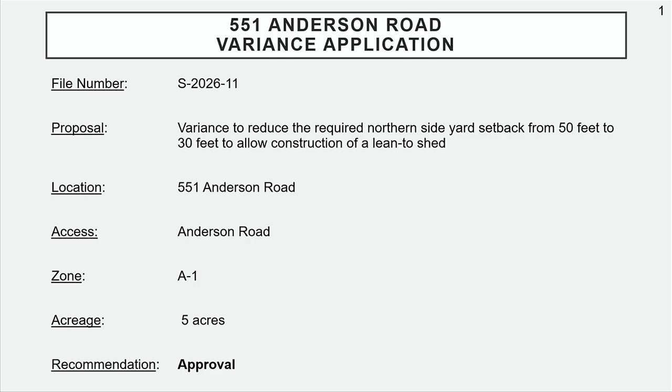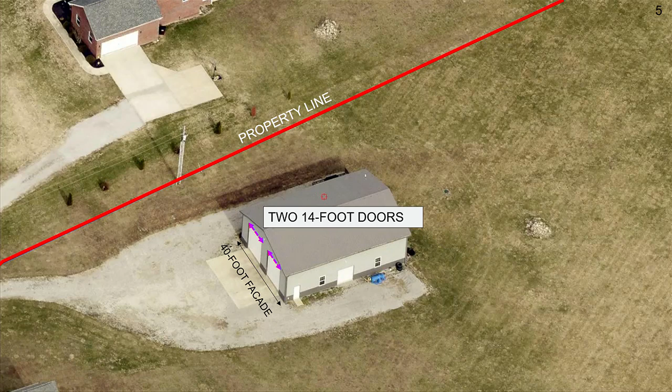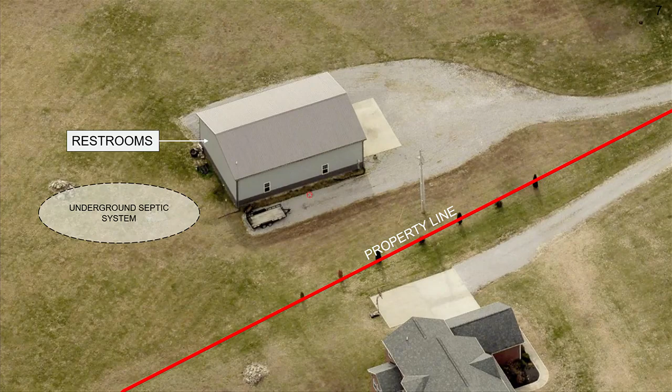As seen in the image, the existing workshop structure contains two doors of 14 feet along the west side, which would be along the 40-foot facade, while the south side has an 8-foot garage door along the 60-foot facade. Additionally, restroom facilities are located along the east wall that are served by an underground septic system.

Therefore, the proposed lean-to shed addition is located on the north side of the property, and the addition is proposed to be open on the east and west ends and constructed with a metal frame extending along the full 60 feet length. Additionally, as shown earlier, the site slopes downwards towards the southeast, which further limits feasible construction areas.

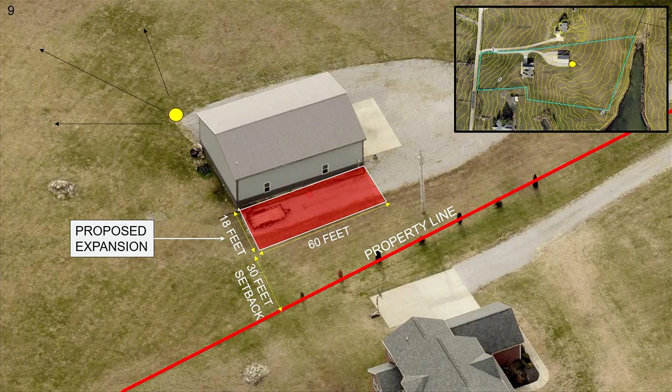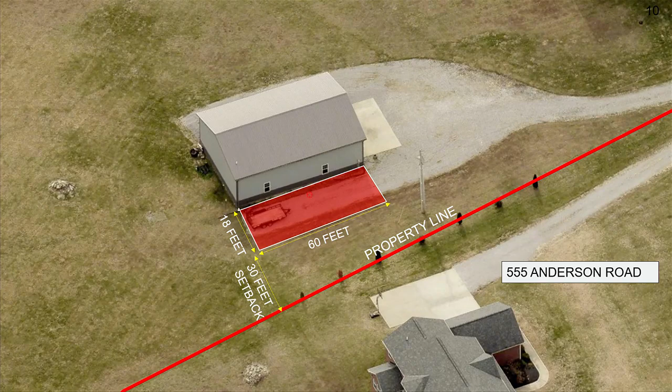Staff also received a letter from the adjoining northern property at 555 Anderson Road stating that they do not object to the proposed encroachment.

In reviewing this request, the board is reminded of the criteria outlined under KRS 100.243, which governs the granting of variances. Before any variance is granted, the board must find that the variance will not affect public health, safety, or welfare, will not alter the essential character of the general vicinity, will not cause a hazard or nuisance to the public, and will not allow an unreasonable circumvention of zoning regulation.

Based on the criteria, staff finds that the request is supported by site-specific constraints, including the existing workshop layout and septic system location, which limit feasible expansion areas. Strict application of the setback would restrict reasonable use of the property, and the hardship is not self-created. Staff further finds that the request would not adversely impact public health, safety, or welfare, nor alter the essential character of the area.

In terms of findings, the project site is a 5-acre parcel zoned A1, which requires a minimum 50-foot setback from all property lines. The property is developed with a single family residence and an existing workshop used for storage and equipment parking. The applicant proposes to construct an 18 by 60 foot lean-to addition attached to the northern side of the existing structure. Existing site conditions limit feasible locations for the proposed addition and create a site-specific hardship.

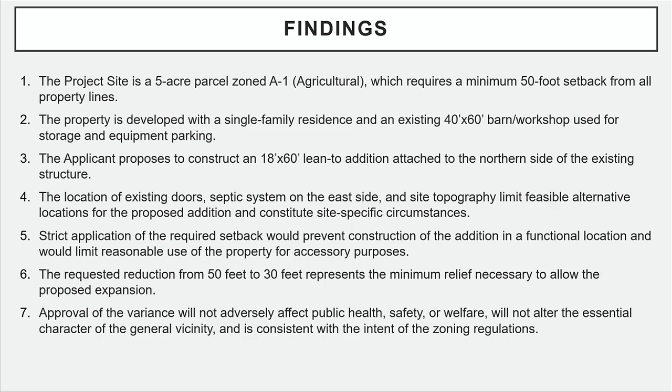Staff finds that the requested variance is the minimum relief necessary to allow reasonable use of the property. In conclusion, staff recommends approval of the variance to reduce the required northern side yard setback from 50 feet to 30 feet at the subject property, with the standard conditions of approval as stated in the staff report.

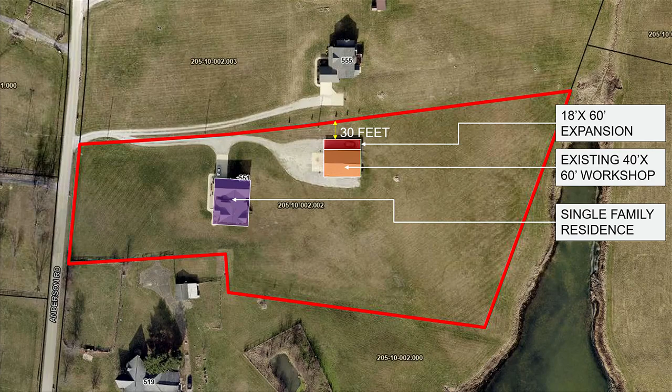Does the board have any questions for the staff? Charlie, do you have any concerns? Any concerns from citizens or nearby neighbors? No phone calls.

It's just that the adjoining property at 555 is in support of this encroachment. Is Mr. Richards present? Yes. Would you like to add anything to it? No, I think she stated it well.

Okay, it looks like you already used that space, right? For the, it looks like a gooseneck or something. Is it for a gooseneck that's already there, or a trailer? I've got a trailer parked there right now. So this would just be a shelter over it, over a space that's already used? Yeah, I want to clear out some spot inside the building. I've got a camper inside of it, and I'd like to actually put that over in the lean-to, so it's additional space to clean out my building inside.

Okay, did we hear any motions? Any further questions? No questions, but I'm ready to make a motion. I make the motion we approve application number S-2026-11 for a variance application to reduce the northern side setback from 50 feet to 30 feet to allow construction of a lean-to shed, based on staff findings and recommendations of approval. I'll second. All in favor? Aye. Aye. Against? Motion carries.

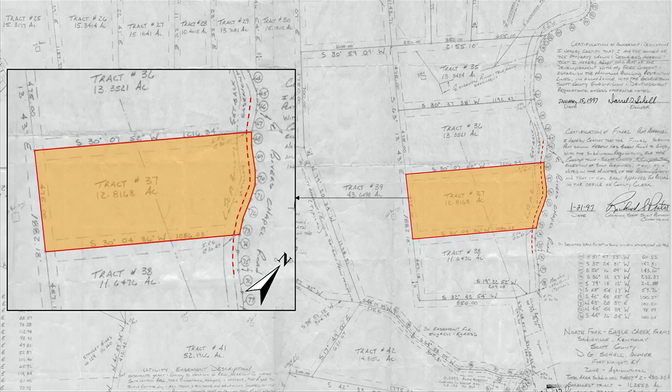As seen on the plat, a waterline easement is located along the northern portion of the site, and staff received a letter from Harrison County Water Association confirming that the proposed placement of the modular home will not impact the existing underground water infrastructure. The guidelines for KRS 100.243 are as mentioned in the previous presentation.

Upon review, staff finds that the request is supported by site-specific constraints, including steep topography and overhead electric lines that limit feasible building areas of the property. Strict application of the setback would prevent reasonable residential use of the site, and approval of the variance would not adversely affect public health, safety, or welfare.

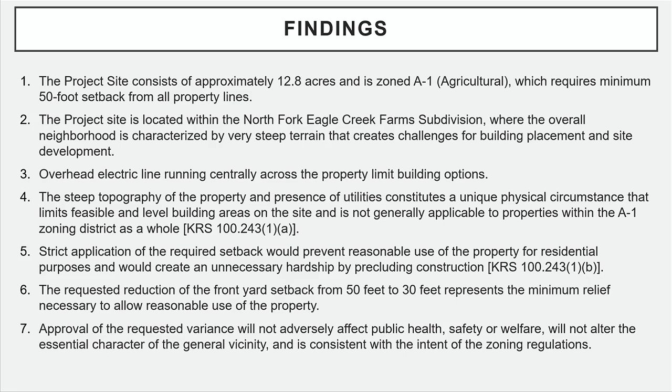In terms of findings, the project site consists of approximately 12.8 acres and is zoned A1. The project site is located within the North Fork Eagle Creek Farms Subdivision, where the overall neighborhood consists of very steep terrain that creates challenges for site development. Overhead electric lines run centrally across the property, limiting building options. The property contains unique physical constraints, including steep topography and utilities, which limit feasible building areas and create an unnecessary hardship under strict application of the setback. Staff finds that the request is the minimum relief necessary and will not adversely affect the surrounding area.

In conclusion, staff recommends approval of the variance to reduce the required front yard setback from 50 feet to 30 feet at the subject property with the standard conditions of approval as stated.

I believe the applicant is not present for today's meeting. I drove by there and looked at that site. Is he going to have much of a backyard at all in there? I mean, not that it has anything to do with this, but it just looks like it's very steep behind where he's going to put that.

Yeah, so the electric lines sort of divide the property into two, so the rear part of the property just becomes not usable, and given the fact that it is in a very steep terrain neighborhood, the requested location was the most feasible spot for the residence.

Any further questions? Everything okay with you, Charlie? Ma'am, no calls or concerns from neighbors? No. Everybody?

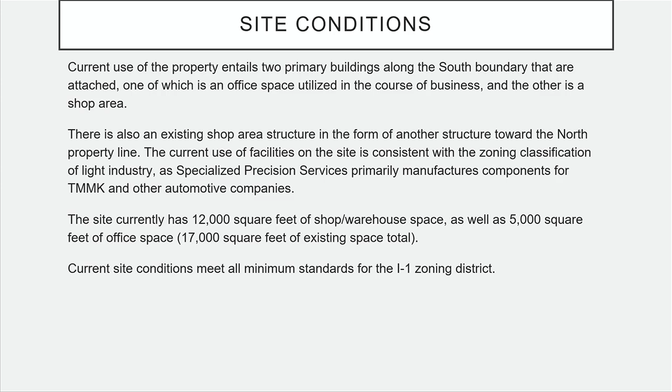So the current use of the facilities on the site are consistent with the light industrial zoning classification, and that's because Specialized Precision Services primarily manufactures components for Toyota Motors and other automotive companies in the area. The site currently has 12,000 square feet of shop warehouse space and then 5,000 square feet of office space, so about 17,000 square feet of existing primary use space total right now. And those current site conditions do meet all the typical minimum standards for the I-1 district.

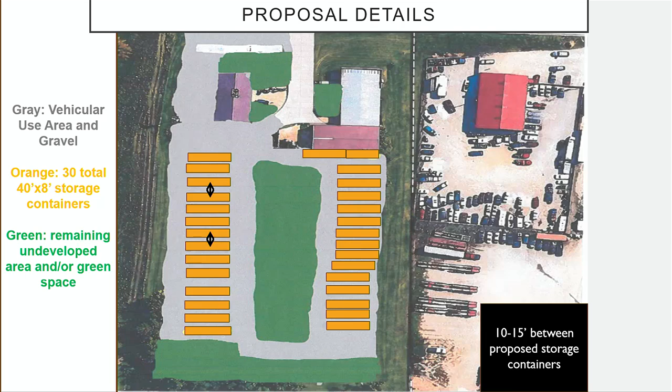To get into the finer details of the dimensions of this proposal, you've got 30 total containers, each 40 feet long and 8 feet wide. All 30 of those containers put together will take up about 9,600 square feet.

The total area to be gravelled is going to be 45,800 square feet. 27,800 square feet of that is gravel vehicular use area, and the other 18,000 square feet is not designated for VUA. So you're looking at about 48,500 square feet total for this proposal, because those storage containers will be located on top of the gravel area, and that's about 1.05 acres to be developed as a total with this proposal.

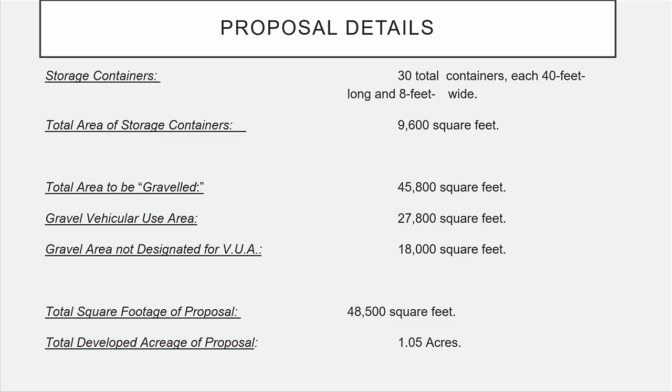The ordinance does allow for outdoor storage as a conditional use in the light industrial zone, but it has 4 specific conditions that must be met for approval. First, storage has to be incidental and accessory to the principal use of the property. Second, it can't be visible from the right-of-way, in this case Industry Road, or from adjacent areas of a different zoning classification.

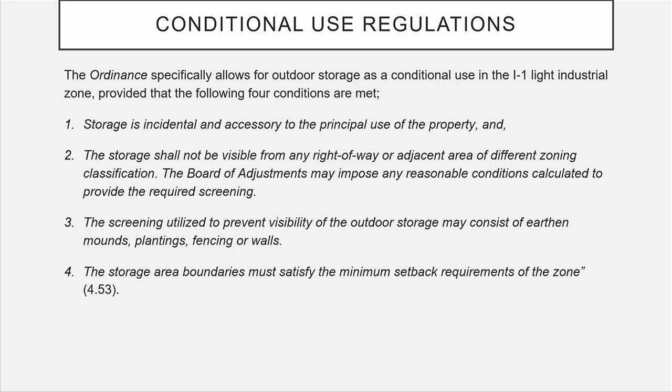In this case, that's the A1 zone to the north. Third, there are provisions about the screening needed to reduce that visibility. And fourth, the storage area boundaries must satisfy the minimum setback requirements of the zone, so it can't encroach past the minimum setback lines.

We're going to break it down for each of those specific provisions. For the first, storage has to be a secondary use incidental to the existing primary use. Because the existing primary use, as we just talked about with that 17,000 square feet of shop area, is light industrial manufacturing of car parts.

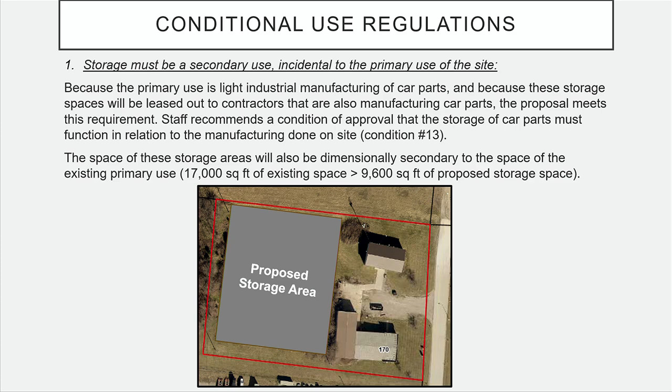Because these storage spaces will be leased out to contractors who are also manufacturing car parts, it does meet this requirement. Staff does recommend a condition that the storage of car parts needs to function in relation to the manufacturing being done on site. It is also dimensionally secondary to the existing primary use, in the sense that you have 9,600 square feet of storage space, which is obviously less than the 17,000 square feet of the existing shop and office area.

The second and third provisions: storage must not be visible from the road or adjacent properties of different zones. You can see on the map the A1 adjacent property of a different zone to the north, and Industry Road, the right-of-way—it can't be visible from either. Starting with Industry Road, staff finds that the storage area won't be visible from that right-of-way because it will be located behind the existing primary structures on site, and there's also a decline in elevation grade from the road to the proposed location of these storage units.

Regarding visibility from properties of the different zoning classification, that A1 to the north, the ordinance requires three things where this use is adjacent to the A1: a 6-foot tall no-climb boundary fence, a 50-foot minimum setback from that property line, and a 50-foot landscape and land use buffer along that common perimeter. All three of those combined will reduce and eliminate visibility from that adjacent property.

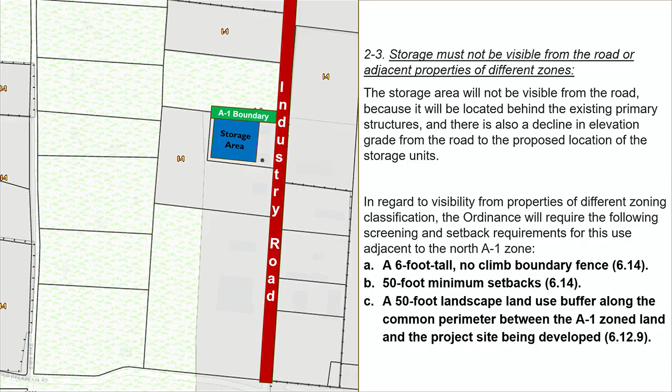Lastly, the storage area must not encroach on typical setback lines. The storage area is held to those minimum 50-foot setbacks to the north, where the A1 zone is, and it's also held to the typical I1 minimum setbacks to all other property boundaries, which is 50 feet to the front, 50 feet to the rear, and 25 feet to the side. The applicant has also indicated their intent to provide property boundary fencing along all property lines, which would naturally provide a further level of visual screening, even where not technically required by the ordinance.

Those 4 specific use regulations for outdoor storage will all be enforced at the time of development plan review. That brings us to the last point of analysis: the ordinance requires a development plan for this proposal due to its scale, clearly showing more than 10,000 square feet of additions and more than 10% spatial expansion.

Staff also notes that because of the scale of the gravel and vehicular use area that you're putting in, there's going to need to be a lot of consideration of stormwater management by engineering staff and planning staff at the time of development plan review.

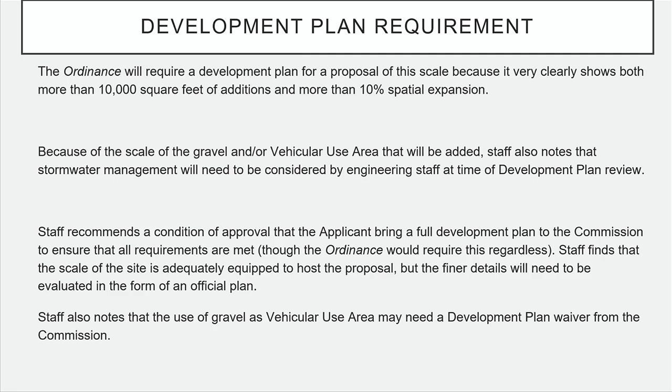So staff recommends the condition of approval that this development plan needs to come to the commission, but the ordinance would require this in any case. And staff also notes that that vehicular use area may need a development plan waiver from the commission, because the way our code is written right now, it does not allow for gravel as vehicular use area.

So findings: the project site is a 2.76 acre property zoned I1. The proposal is defined as a conditional use permit for outdoor storage. As indicated in written submittals by the applicant, the conditional use will consist of 9,600 square feet of storage containers, those 30, 40 by 8 foot containers, 27,800 square feet of vehicular use area, and 17,000 square feet of additional gravel area.

The proposal is light industrial in nature, and that is consistent with the intent of the I1 zoning district. The comprehensive plan does indicate a need for uses of this nature, and this proposal does provide a benefit to the public welfare because it provides that necessary function for the local economy. It gives independent contractors for TMMK a space to perform their work.

Number 6, the ordinance is going to require that specific set of standards. Storage has to be secondary to the primary use. Storage must be effectively screened so that it is not visible from the right-of-way or that A1 to the north, and the storage area has to follow the typical minimum setback standards. And all of that can be reasonably expected for the site, and all of it will be required at time of development plan.

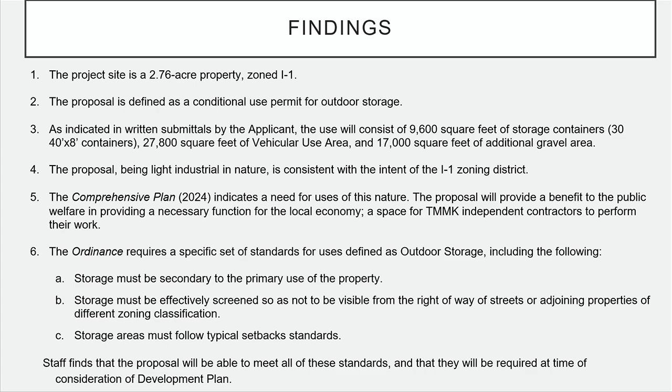Number 5, in light of the large scale of the use, as well as some specific standards to which the site will be held, it will require both preliminary and final development plan prior to construction. The gravel areas may require a waiver for use of gravel as vehicular use area. The site is not located within the floodplain. The site may need a grading or stormwater management plan because of the addition of impervious surfaces.

And lastly, the proposal is appropriate for the site because it can be expected to meet all standards for an outdoor storage in the light industrial district. Conditions of approval and current regulations are going to negate any potential negative impacts on the surrounding area. And lastly, the required development plan is going to ensure that all of those standards are properly implemented.

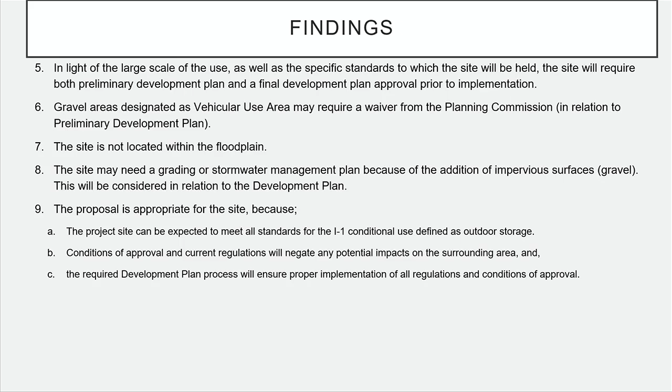So given findings and analysis, staff does recommend approval of this request for a conditional use permit for outdoor storage area of 9,600 square feet of containers, 27,800 square feet of vehicular use area, and 17,000 square feet of additional gravel area, 1.05 acres in total, in the I1 zoning district at the property address 170 Industry Road.

And should the board approve this application, staff recommends the following conditions of approval. We have 4 of our standard conditions of approval for conditional use permits. Number 5, the storage area shall meet all setback requirements and shall not encroach on those areas. Number 6, the applicant needs to submit preliminary and final development plan.

Number 7, stormwater and drainage plans must be addressed with the development plan to the satisfaction of the requirements of the subregs and the commission engineer. Number 8, the 6-foot tall no-climb fence, and then the 50-foot setback and landscape buffer needs to be put in when adjoining that A1 zone land.

Number 9, any and all uses of the applicant or the applicant's potential lessees in relation to the storage containers must meet the standards of light industry as defined by 2.1 of the ordinance. Number 10, all requirements, those 4 basic requirements for conditional use defined as outdoor storage as outlined in section 4.53. All requirements of local regulations will be considered at time of development plan review, particularly for implementation of screening and the implementation of the proposed gravel vehicular use area.

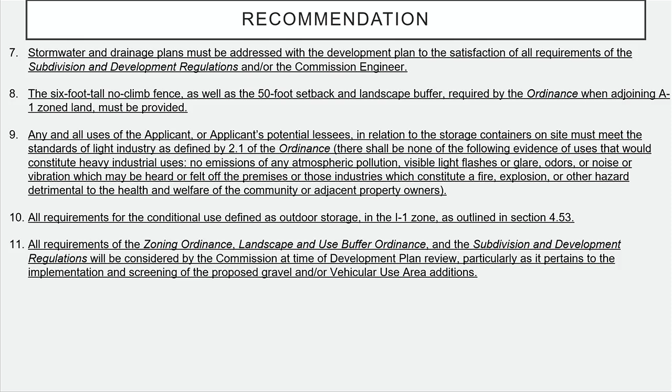On the development plan, the applicant shall show the interior landscape area as well as all necessary vehicular use area perimeter screening as required by the landscape and use buffer ordinance. Item 13, the use of the storage structures must be incidental to the existing primary use of the site. Item 14, the issue regarding the gravel vehicular use area will be considered at time of development plan, and it will either conform to the requirements of the ordinance or require a waiver from the commission.

So thank you for bearing with me through all of that. Does the board have any questions for staff at this time?

Yeah, I got a question. On the 30 storage containers, are they having any kind of electric or water to them? At this time, we have not developed that far, but we're going to look at that through our development plan.

I'm Ron Nell, one of the co-owners of the building. Thank you for listening. Do you own the property? Are you the owner of the property as well? Yeah, I'm co-owner of the physical property, yes.

A little history on what prompted this: as you know, Toyota is developing and expanding right now. They had laydown areas for us contractors out at Toyota for probably 30 years. They have needed that space recently and asked all contractors to evacuate the site and go elsewhere. It's been a Wild West out there, honestly. We're a prime general contractor that does a great deal of high-level, high-profile jobs at Toyota.